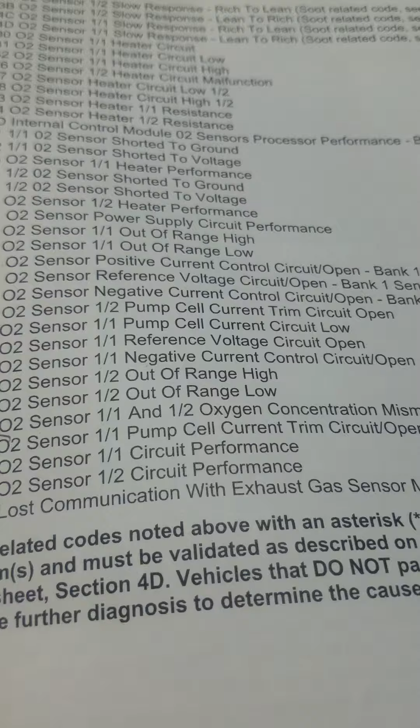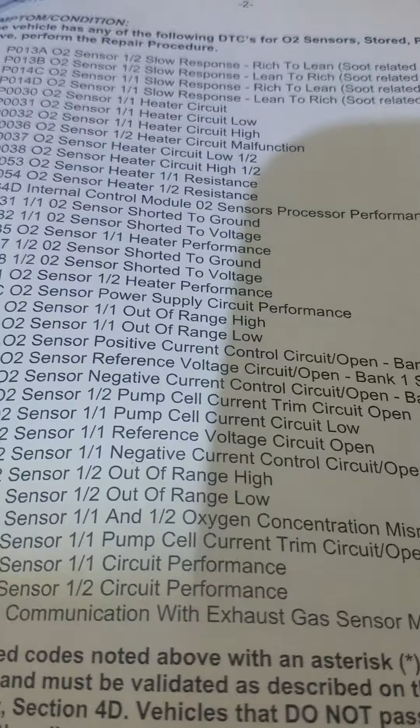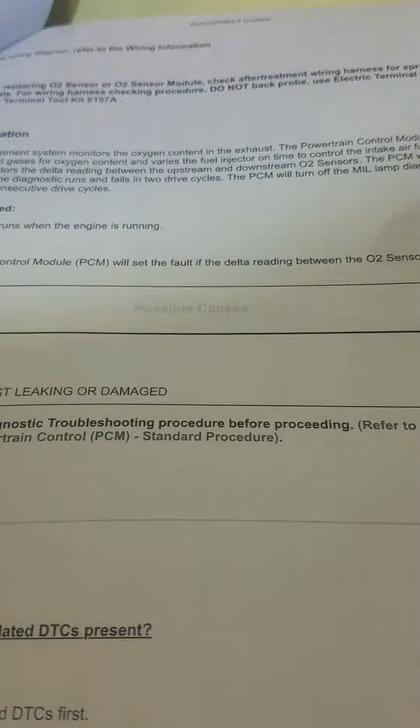Okay, so in this video we're going to talk about Cummins oxygen sensor codes. Some 2010 through 13s had some problems with the modules and the harness. So if you have any of these oxygen sensor codes, like, let's see, what does this one say? P241A, 1 and 2 sensors swapped, basically. Or there's a whole bunch of them. See, there's one that's pretty common here, 2196.

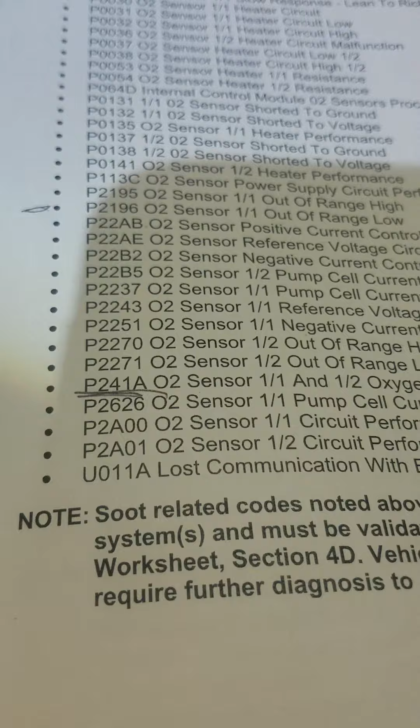Basically what they want you to do is pull the sensors out, look to see if they're sooted up. If they are, clean them, swap them, and stick them back in. If the codes come back, then they want you to replace the sensors. The problem is there's actually a problem with the module itself and the harness.

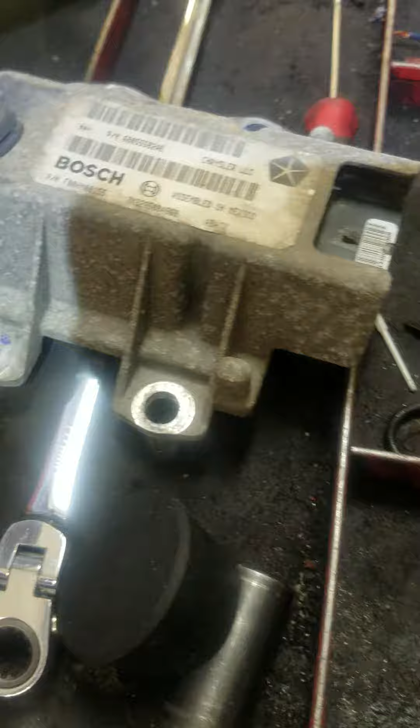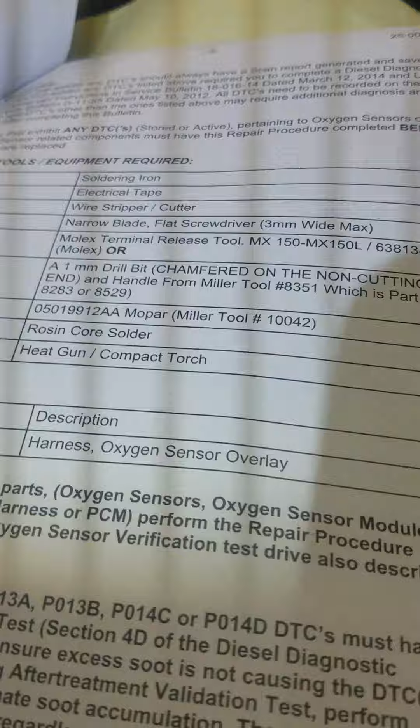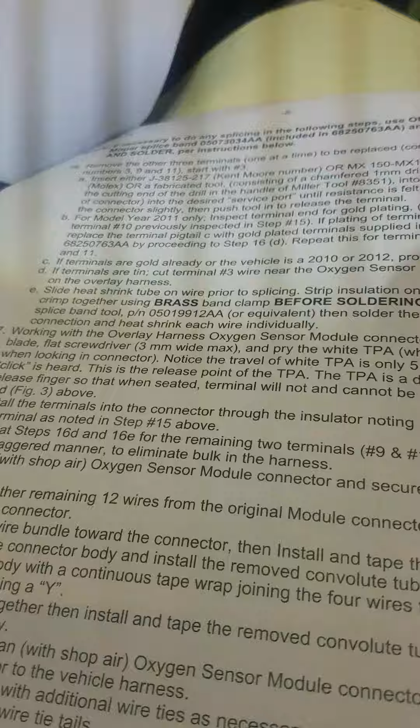So if you were looking through there and you found this bulletin, 25.002.14, that's like 20 gazillion pages, and you started reading through this and you immediately panicked and then sacrificed 17 small children, then it's okay. There's actually hope. It's actually not that bad. So what they want you to do is replace the harness and the module.

So the module lives right here on the frame rail, and if your module part number is not AG at the end, if it's AE or AF, it's outdated, needs to be replaced, period. So what happens is this module is crap, and the harness, I'm not really sure exactly what happens in the harness, but there's an overlay. So basically what they want you to do is unhook the old harness, plug in the new harness.

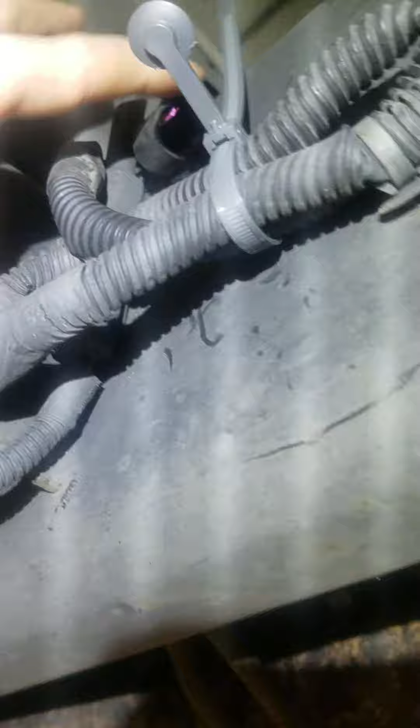Now in the procedure they say they want you to cut these terminals off. I just left them on because there's corrosion prevention inside here, and if you just cut it, there's a chance that water could get in there. So this one's just kind of crudely stuck up there for now, but what they want you to do is unbolt and replace this, put the jumper harness in.

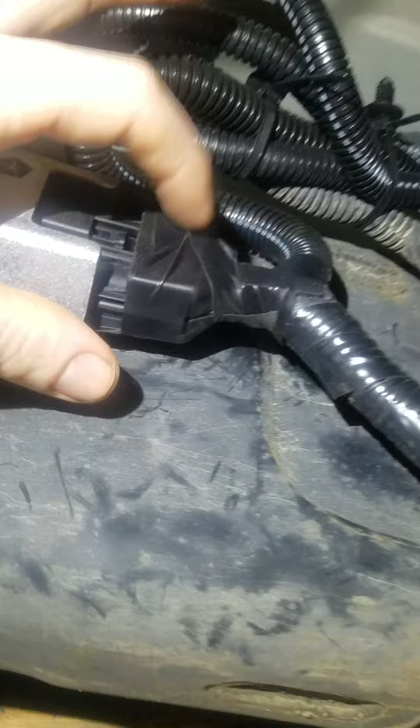Now there's 4 wires in the old connector that have to be swapped over. There's power and a ground and the 2 CAN bus wires. All you gotta do is use your little pick tool, pull the plastic retainers that are in the dummy spots on the new connector, pull those out, pull the wires out one by one and swap them, plug it in. That's all there is to it. It really only takes about like 20 minutes or so.

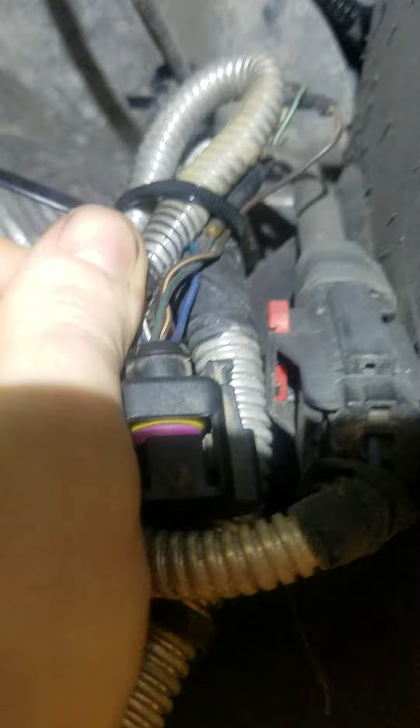It's not that bad. And then the other part of the procedure is they want you to cut both of these off and the main harness connector. You see, somebody's already been in here. This is a factory repair, so it must have been done under warranty before the bulletin came out. I just zip tied them up out of the way because I don't want to cut this like the procedure says and introduce water, moisture, anything into the harness.

But that's pretty much it. Module and the harness, and that should take care of most of your 2010 through 13 oxygen sensor problems.